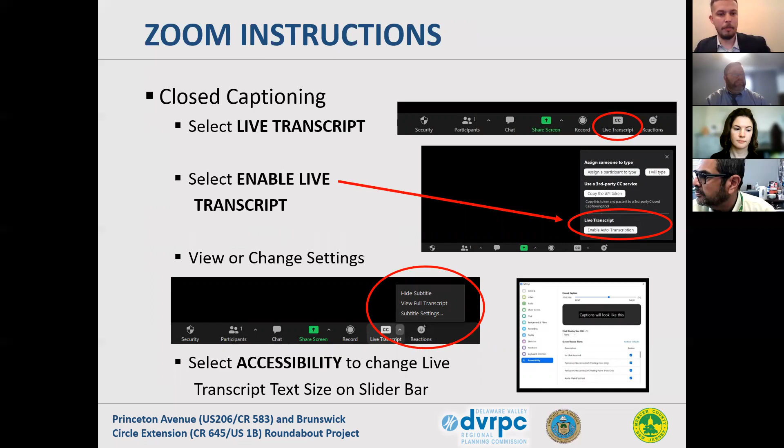So you already heard from your county engineer, Sonny. He also mentioned Caitlin Skosipek, who's the principal engineer at Mercer County. We also wanted to mention John Kosa, who's the manager from the Office of Transportation Services at the Delaware Valley Regional Planning Commission, who administers the federal funds for this project.

Myself, I'm Dan Hutton with Urban Engineers, and I'm here today along with Justin DiBiase, who's a senior highway and traffic engineer, and Adam Brown, who's the project manager on the Urban side. So with that, I'm gonna kick it to Adam, and I think we'll get into the meat and bones of the presentation.

Thanks, Dan. You can hear me, correct? Correct. All right, good. Thank you.

Just to go over the agenda real briefly. We're gonna do a little bit of a project background to show you how we got where we are today. Also, we're going to discuss the proposed improvements for this intersection. As you know from the title, we'll be featuring a roundabout for this intersection. We'll discuss some of the other improvements for pedestrians, the lighting improvements, drainage, landscaping.

We're really going to focus some on the staging, just to show how this intersection will be constructed, what you can expect as far as any possible delays or any possible detours that may occur. Then we'll briefly go over the right-of-way, show you the schedule from this point moving forward, and also we'll take questions at the end.

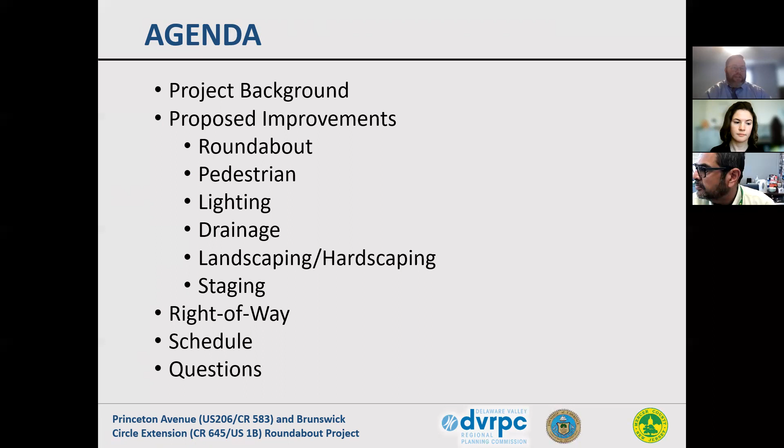So just for some background, as Sonny had mentioned, back in 2008 and 2009, there was a broad study that was done, the Princeton Avenue Spruce Street study. Within that study, there were several public meetings that were held. There were also surveys given out at these meetings to solicit feedback from the public. That was back in April and May of 2008, and then in January 2009.

Out of that study, there was a recommendation for a road diet along Princeton Avenue, as well as a roundabout at the Princeton Avenue Brunswick Circle Extension intersection. Then moving forward to 2014 and 2015, the DVRPC has its Highway Safety Improvement Program, which gives federal funds to safety projects in the region, some specifically for roundabouts. So Mercer County proposed the roundabout design that came out of that initial study to DVRPC.

Federal Highway and NJDOT performed a Highway Safety Manual crash reduction benefit-to-improvement analysis for that proposed improvement. And from that, it was deemed that the project could move forward, and it was advanced to the preliminary engineering stage, which brings us to how Urban got involved. We were selected as the engineer to design the proposed improvements. And as Sonny also mentioned, back in May of 2019, we had our first public info center, which was held at the Trenton Farmers Market.

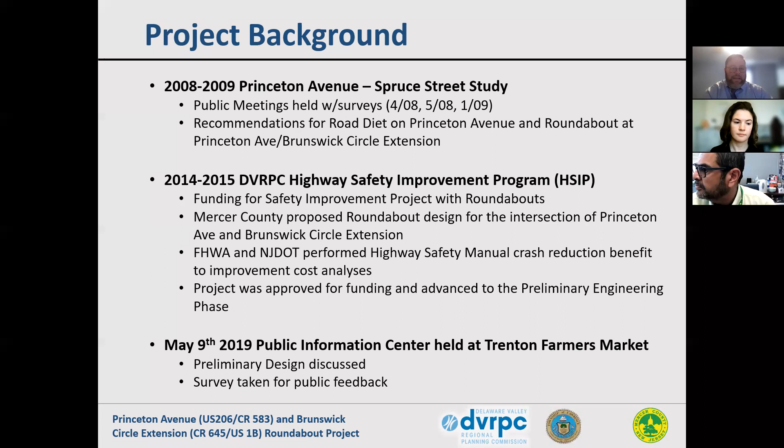The purpose of that meeting was just to introduce the design to the public. There was also a survey provided at that meeting to get public feedback for the proposed design. This just goes over a brief timeline of the project process for the federal projects.

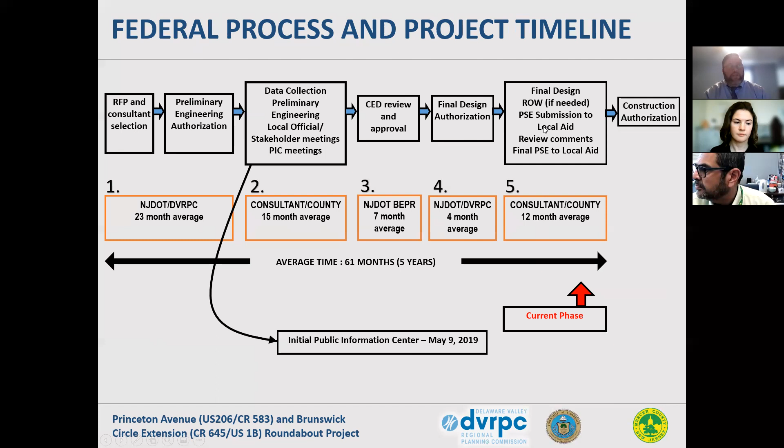As you can see, where we got involved first was from the consultant selection into preliminary engineering, data collection, initial design phase. That's where we held that initial public info center. Went through the environmental reviews, final design authorization, and that's kind of where we are now. We're in the final design phase, starting with the right-of-way, getting the PS&E submission prepared to be submitted. And then again, as Sonny said, hopefully for construction authorization and begin construction next spring.

So for this intersection, for the project purpose and need, as it was stated in the RFP, the proposal once we got it, the purpose is to improve safety and traffic operations at the intersection of Princeton Avenue and Brunswick Circle Extension with a focus on pedestrian and bicycle safety.

The needs: there's a high frequency of sideswipe and encroachment crashes along Princeton Avenue in this area. There's a difficult and dangerous northbound Princeton Avenue crossing maneuver in this area here, which you're all familiar with. High-speed conflicts at the intersection, at nearby access points and unsignalized intersections, and there's very limited pedestrian and bicycle accommodations at this intersection.

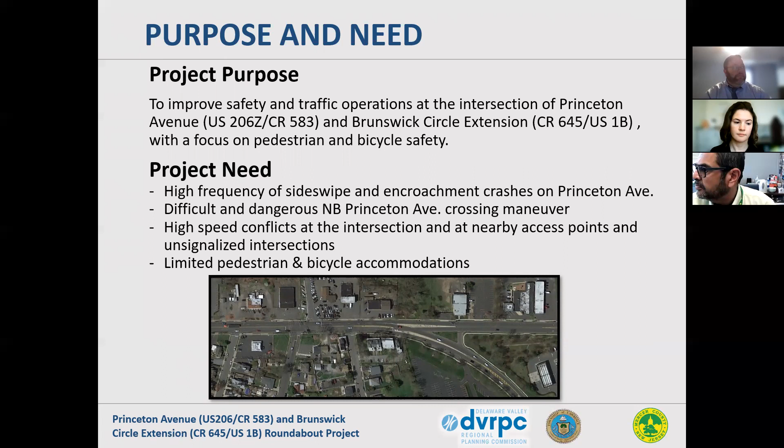So one of the biggest questions or comments that we get is, why roundabouts? I thought we were removing roundabouts. Well, the Federal Highway has identified a modern roundabout as a proven safety countermeasure for intersections. With intersections throughout the country that roundabouts have been proposed for, they've looked at the difference in crash data prior to and then after the roundabout was implemented.

And what they found, over several years, across the country, is that when you compare a roundabout to a two-way stop-controlled intersection, there is a reduction in severe crashes of 82%. For signalized intersections, it's a 78% reduction in severe crashes. A lot of that has to do with the amount of instances where two vehicles can meet or have conflict.

So as you can see down here on the traditional intersection, there's several crossing points where cars could cross each other's paths, diverging and converging points throughout this intersection. As to the roundabout, it's really only where you enter the roundabout and leave the roundabout. As you know, there's no left turns within a roundabout. Everything is to the right. So to make a left turn, you go to the right. So by removing those conflict points, you're preventing those instances from ever happening. That's why there's such a great reduction in the amount of severe crashes that occur.

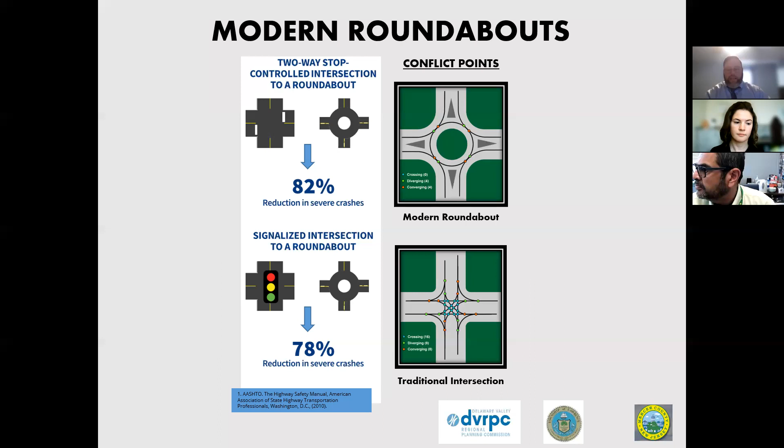Another big thing is, our modern roundabouts are different than traffic circles, because throughout New Jersey, you see traffic circles being removed, and all of a sudden we're putting back in these modern roundabouts, which a lot of people feel is the same thing. Well, just to show you a little bit of the differences, for modern roundabouts, it is yield on entry.

You may notice across the state, where you've been in a traffic circle, the predominant move, if it's a larger highway, may have the right of way, and other vehicles entering may have the yield. So there are times where you'll have cars yielding within the circulating roadway. With the modern roundabout approach, all vehicles within the circulating lane have the right of way. All vehicles entering the roundabout have to yield to those circulating within the roundabout.

There's deflection on entry. So notice we'll have these splitter islands on all the approaches. And what that does is it makes the driver have to slow down. They physically can't just shoot through the roundabout at a high rate of speed. They have to slow down to navigate those deflections. Slow speeds reduce impact speed. So if something were to occur within a roundabout, it would be a very low speed, low impact crash.

Slow circulating speeds: these are designed so the speeds range anywhere from 16 to 20 miles an hour. Obviously, again, slower moving vehicles through the roundabout itself helps decrease the severity of any crashes that may occur.

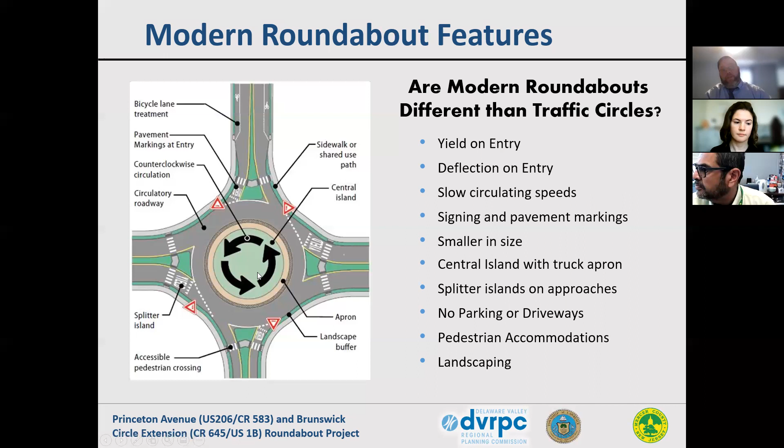As I said before, with the deflection on entry, we have these splitter islands on approaches. And as you can see on these splitter islands, you have pedestrian crosswalks. And they're set back, if you look where the yield bars are, or these little shark's teeth, as we call them, there's enough space for one car. So that way a car can come up and yield, pay attention to the traffic that it's trying to enter, but the pedestrians can cross in behind that vehicle, and any other cars that are queuing up will be able to see that pedestrian as they cross. Pedestrian accommodations, and there's also opportunities for landscaping to beautify the center of this roundabout.

So are modern roundabouts different than traffic circles? Yes, they are much different. They behave differently, they're sized differently. So they are not the same thing. And just some other benefits, again, because of the smaller size, the proper signing and striping, the slower speeds, you reduce the rate of crashes, the severity of those crashes, which could lead to injury or fatalities, and reduction of speeds on approach and through the intersection.

In the existing condition, the Princeton Avenue Brunswick Circle path is pretty much a straight shot, so you can carry high speeds through this intersection to the circle or back into the more downtown area, which, if people are stopped at a light and someone's carrying high speed, can cause people to slam on the brakes. But with this, maintaining that slow speed throughout the intersection, it'll help reduce those high speeds.

Removing driver confusion, it's going to be only a single lane, so there's no being confused on which lane to get into or how to navigate through. There's only one lane you can use. And it improves sight lines and sight distances. When roundabouts are designed appropriately, as you approach, you should be able to have a clear view of what's coming from your left, because that's where the only traffic is going to be coming from. It's going to be clear of any obstructions, signs, trees, anything like that.

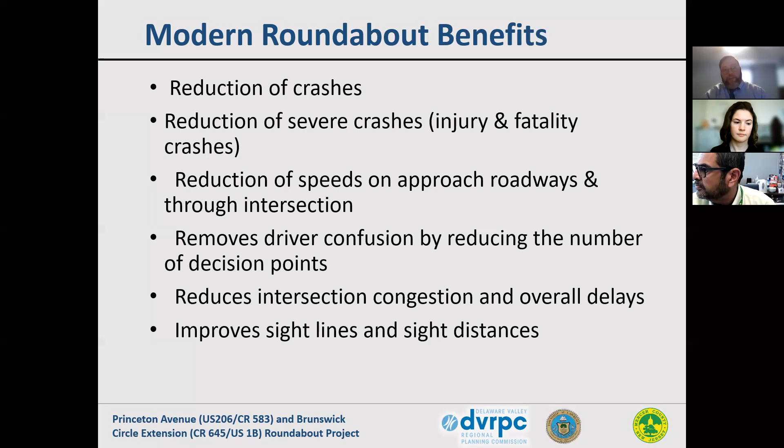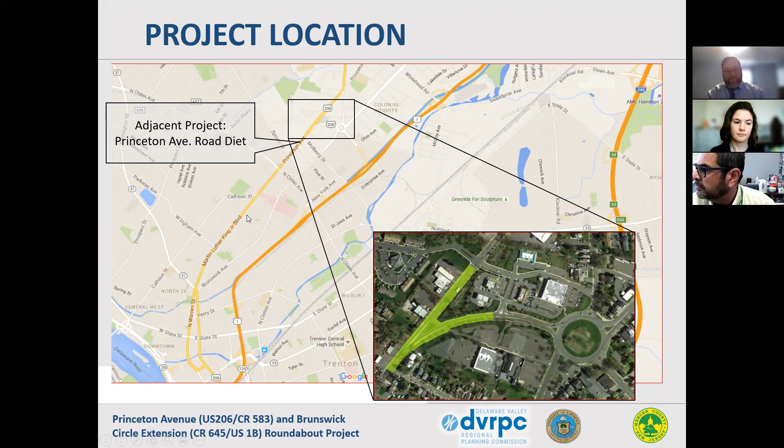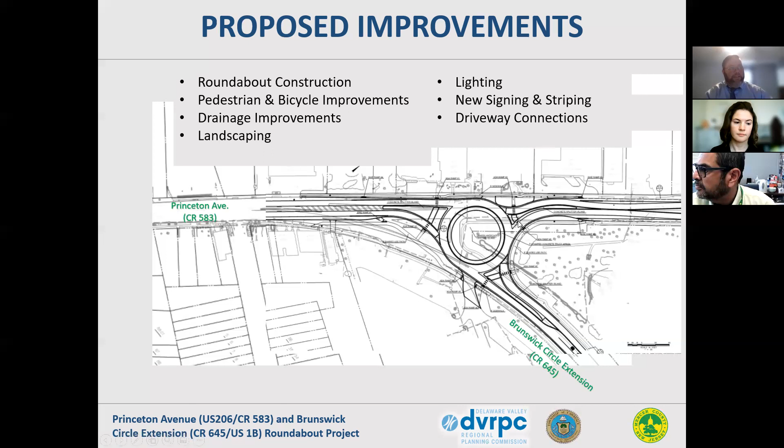So as far as some proposed improvements, this is the existing condition as it is today. And this is an overlay of the roundabout, so you can get an idea for this area in here, which is currently where this one right turn can be made. That's almost where the central circle for this roundabout will be positioned. And the reason it's done this way is one of the things we try to do is to limit right-of-way as much as we can and reduce environmental impacts. And after several iterations, this was the ideal size and location for the roundabout to minimize all those impacts.

Some of the things we're going to be adding, since pedestrians and bicycles were a focus of the safety issues for this intersection: as you can see here in this green area, it's a wider 8 to 10 foot multi-use path, so that can be utilized by both pedestrians and bicyclists.

As a bicyclist approaches a roundabout, they have one of two options. They can either use a bicycle ramp, which we will have included in our design, where they can get off the roadway and onto the multi-use path while still riding their bike. And they can utilize the path to travel around the roundabout and then exit on the other side, where there will be the continuation of that bike lane.

Or the bicyclist has the option to navigate the roundabout as a car would. So they would stay in their lane, they'd come up to the yield, they'd wait for their spot, and they travel through. So bicyclists do have the option of either. Most would use the multi-use path, but maybe some more experienced bicyclists who are familiar with navigating with vehicles would stay in their lane.

And in the blue, you can see these are tying into existing sidewalk in the area and then redoing the sidewalk along this north side. And on each leg, we have pedestrian crosswalks and a pedestrian refuge space. So when a pedestrian crosses, they can wait for their safe time to cross the other leg of the roundabout.

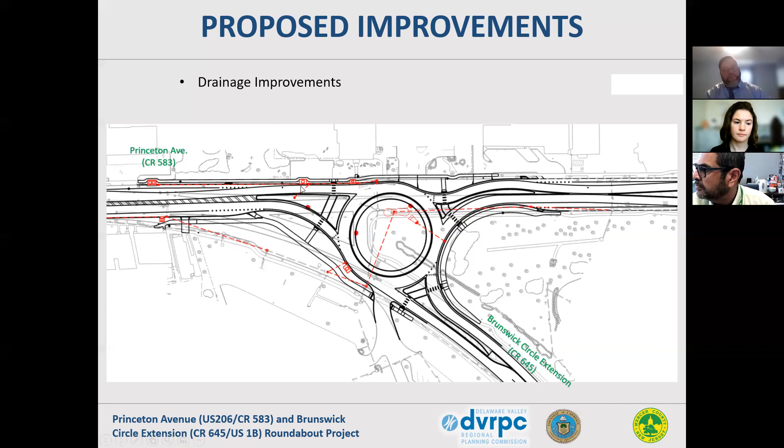Drainage improvements: we want to make sure with a proper design that the area will still drain appropriately. We don't want standing water. We don't want any ponding. So drainage features have been implemented into the design to make sure that that does not happen. It also helps with treatment of water, so it doesn't go straight into your drainage system. It'll go into some other facilities, which will help it infiltrate back into the soil before going into the drainage system.

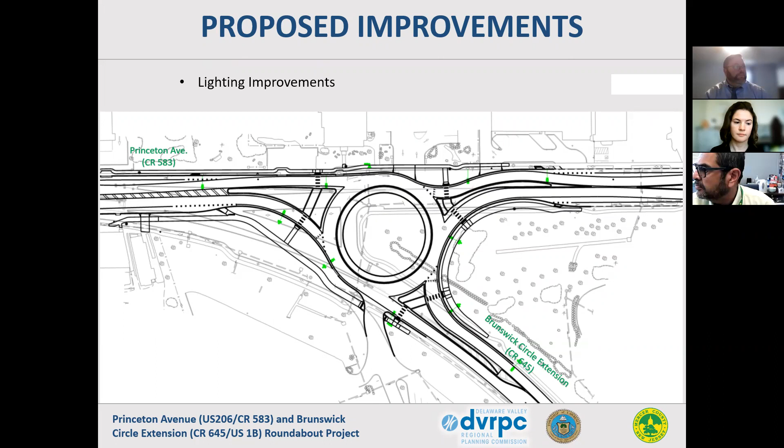And what I'm going to show you right now is a quick 2-minute video that'll just give you a feel for how the roundabout will behave with live traffic. We added school buses and some tractor trailers. There's actually a bicyclist who will use that multi-use path and cross at the more southern leg of the roundabout.

So as vehicles approach, they'll be going the speed limit of the roadway, but as they approach, they'll be slowing down to 25 miles an hour, yielding upon entry, and then circulating at that 17 to 20, 25 miles an hour.

If you can hear that, that's my dog, sorry.

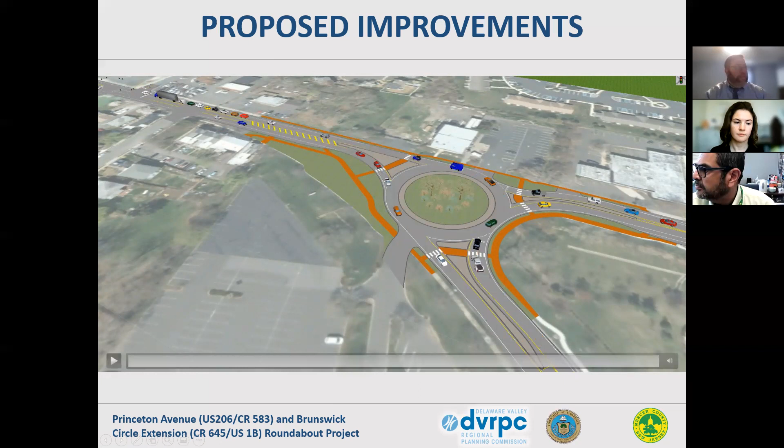All right, now I'm going to hand it over to Justin DiBiase. He'll go over the traffic control for this project. Thank you, Adam. As was stated, I'm going to discuss the staging, or how this thing is going to get built. There are 4 stages of construction. I'm going to just explain each one, what you can expect.

Prior to going through each stage, I wanted to state that, with this design, we thought about implementing either a full detour or staged construction, so keeping traffic open. And it was important to the design team that we keep traffic flowing and keep it moving through here. It's a very important intersection with the circle and a lot of important arterials in the network. So the decision was made to stage construction.

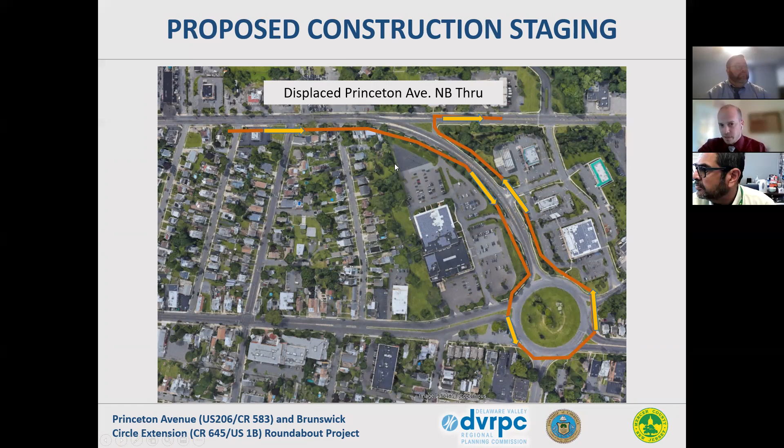Like I said, all movements will be available. Sonny mentioned before, overall, this is going to be 9 to 12 months, we estimate. Stage 1 and stage 2 are going to be the major stages of construction. This one we have is 4 months. If you could advance to stage 2, go through that.

Stage 2 is very similar to stage 1 as far as what you're going to experience driving through here. The movements will be similar to stage 1. We're going to be doing some more work on the top side of Princeton Avenue. We're going to shift traffic down there going south. That stop condition that I mentioned previously will go away. But you can see it's very similar as far as utilizing the Brunswick Circle for traffic that wants to continue through on Princeton Avenue going north.

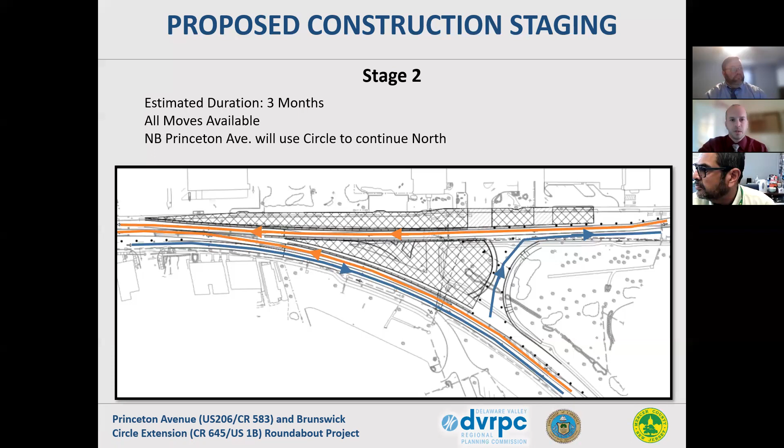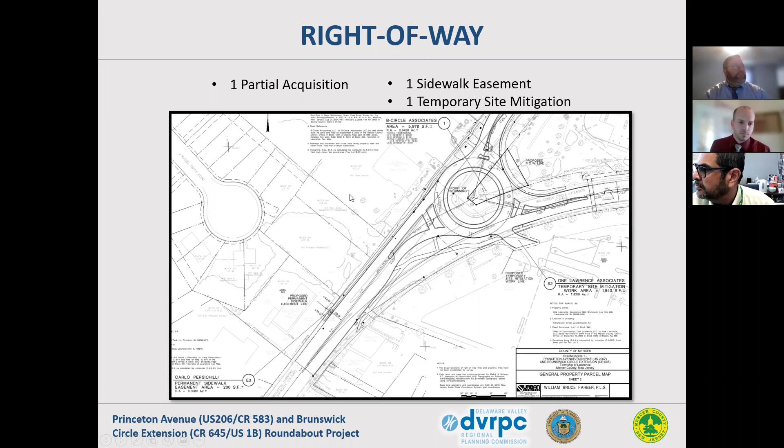So just briefly, with a little bit of schedule moving forward, as we said, the right-of-way documents have been submitted. They've gone to NJDOT to do their review to make sure everything is okay with those, and then they'll go on to the negotiation process. Some ongoing tasks, we have the PS&E to Local Aid. Local Aid has to look at this because this project will receive federal funding. So on their end, they want to make sure everything is good with environmental impacts, pedestrian and bicycle accommodations, going through the right-of-way acquisition process, submitting the final PS&E, and then getting construction authorization.

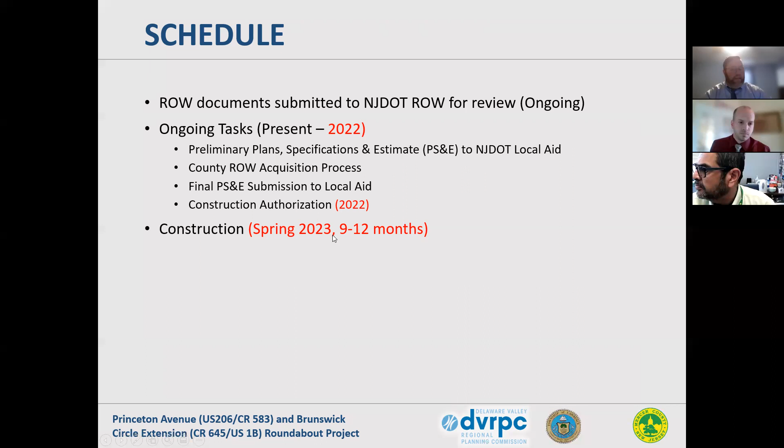As Sunny mentioned in the very beginning of the presentation, we anticipate between 9 and 12 months for the construction, and the goal is to have construction begin spring of 2023. And that's it for me. I want to hand it back over to Dan, who'll go over some final housekeeping things.

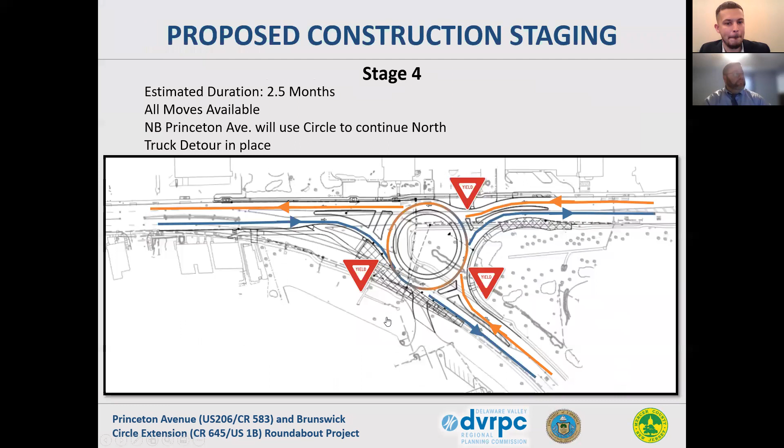A question here is probably for maybe Justin here. The truck and trailer traffic will be negatively affected, won't be good on Olden Avenue. I don't know if anyone has any comment on Olden Avenue, how the detour might affect the truck traffic there. Yeah, so we have it on Olden Avenue. Again, it's not for the entire duration of construction. Stages 1 and 2 are going to be the majority of the construction. 3 and 4 is really when the roundabout is taking shape, and that's when the contractors need more room in there.

But we did look at other routes in the area, and we selected Olden, so it wouldn't be such a long detour route. So we believe that's going to work, not well, but as best as you can. There's going to be inconvenience to the truck drivers through there, but yeah, that's what we have selected. Great, thanks, Justin.